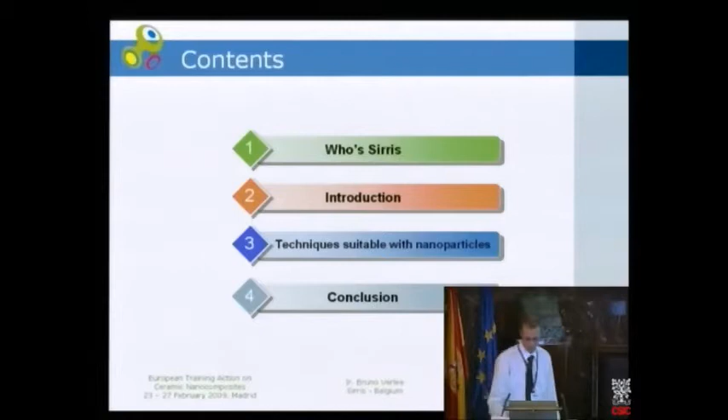I'm going to give you an overview of rapid prototyping. First, I will present my company, then give an introduction to the general principle of rapid prototyping. Then I will go into details of several rapid prototyping techniques that can work with nanoparticles, and summarize this in the conclusion.

First, who is Sirris? This is a research center with approximately 1,500 industrial members. It has 6 sites in Belgium and 140 workers, most of them engineers. There are 2 sites in Wallonia, and I work for Sirris Wallonia.

The objectives of the research center are first research, and then we also provide services for our members, and we do technology foresight. We have 4 centers of competencies in Wallonia.

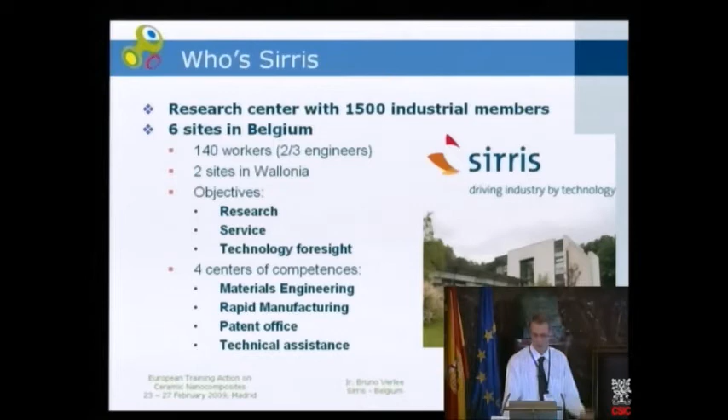The bigger one is materials engineering. We have a rapid manufacturing department, a patent office, and a small team of technical assistants to provide services to our members. With the rapid prototyping department, we make prototypes.

Prototypes can be visual prototypes, when the client only wants a real shape in his hand to check the shape, check its functionality, or check how it works in a process, just to really check the part before starting production. We can also make pre-series.

We have several machines that can use different types of materials: plastic materials, metal materials, and ceramic materials. We also have a team that develops new materials for the machines and optimizes new processes for a machine.

We also do rapid tooling. What is rapid tooling? It's rapid manufacturing of a mold with special features. We do this in collaboration with mold makers.

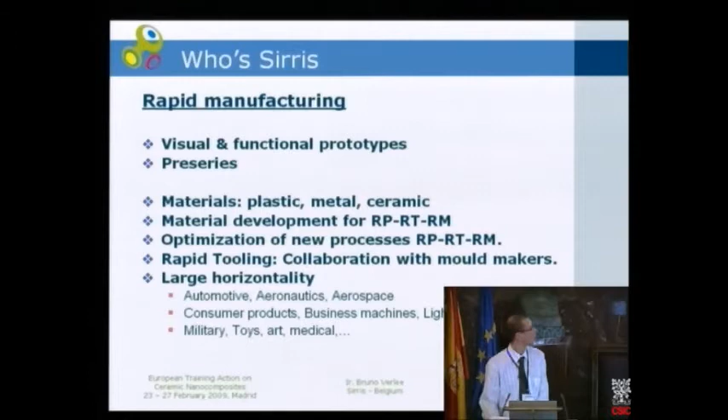We can work for a wide range of different kinds of industry: automotive, aeronautics, aerospace, military, electronics, consumer products. We can make very different kinds of parts.

Let's see now what rapid prototyping is. We have to see rapid prototyping beside another well-known technique: traditional machining. In machining, we start from a block of material and remove material with cutting tools. By milling, drilling, cutting, we shape the desired part.

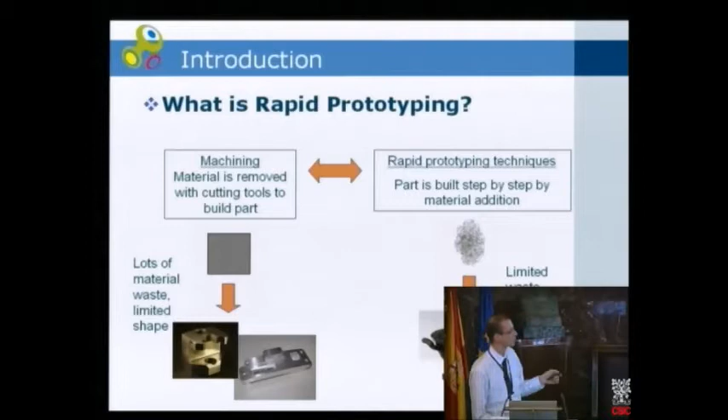Thus, in rapid prototyping, we build the part step by step by material addition. We start from a raw material—in this case, powder—and we build the final part step by step, directly, with a limited quantity of waste, and we have virtually no shape limit. Theoretically there is no limit, but there are some parameters that will limit the shapes we can do.

How does it work? We always start from 3D CAD files, and these files are sliced into 2D slices of adjustable thickness. These slices are sent to the machine, and the machine builds the 3D part by adding all these 2D slices together. We can make very complicated shapes, like this.

Here we have what we call rapid tooling: a mold with a very special feature called conformal cooling. There is a cooling channel that follows the shape of the part inside, just under the surface. We can't do this by traditional machining, but it's also possible to do it by rapid prototyping.

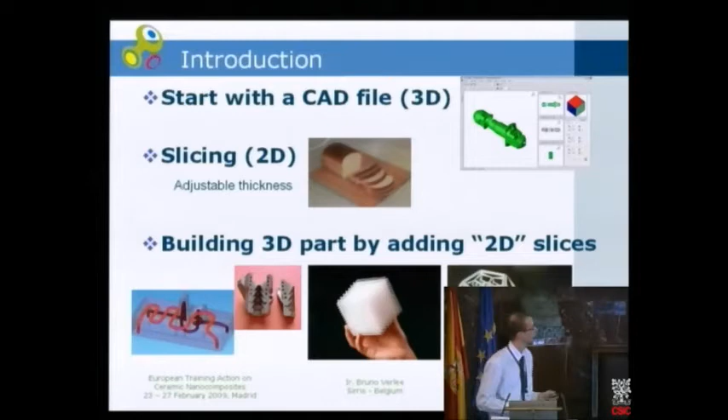We also have another example here, a metallic part with a very complex shape and a helicoidal cooling channel inside. We can make internal 3D structures like this, or simply a part with a very complicated shape using different kinds of materials.

We have different kinds of techniques that work with different kinds of materials. The building techniques build the part step by step, for example by using a UV polymerizing laser, starting with a liquid resin or a paste, which is a blend of resin and powder. This paste or resin is photo-curable, so when exposed to the laser it polymerizes, and we progressively build the part layer by layer.

Another technique is laser or electron beam melting. In this case, we start from powder—polymer powder, metal powder, or ceramic powder—and a laser locally melts the powder to build each layer of the part. The part is built layer by layer as well.

Instead of melting, you can have laser sintering or printing a binder. This binder is printed much like on a desktop printer: we print the binder onto the powder bed, stick the powder locally, and then we have to debind and sinter the part.

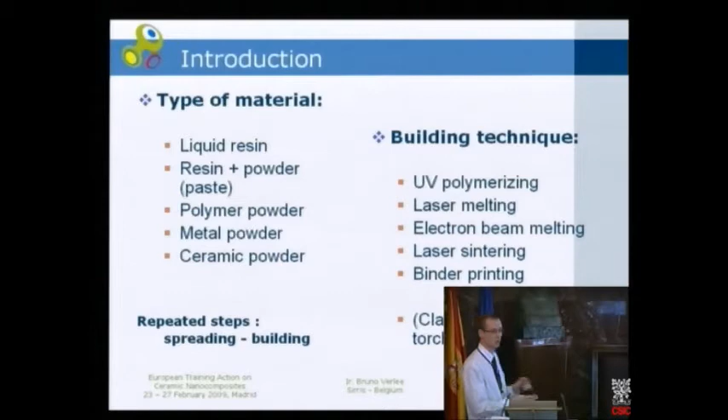There is a relatively new technology called cladding. In this technology, the two steps of the building process are done in one step. The powder is directly injected into the torch, and the part is built directly on the plate. There is no separate step of spreading and building—it's all done in one step.

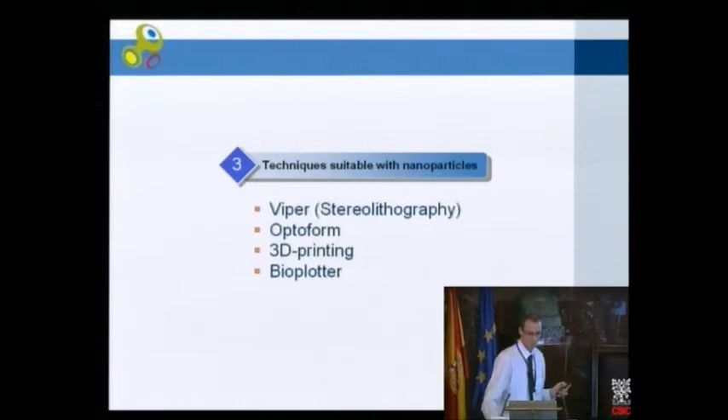Let's go now for an overview of four different technologies of rapid prototyping that can use nanoparticles. First, I will see the Viper stereolithography. Then I will see the Optoform process, then 3D printing, and finally bioplotter.

Let's go first with the SLA Viper, which is a high-resolution stereolithography. This technology is sold by a company called 3D Systems, and by using this technology, you can build a part with very small details using a UV photo-curable resin.

Here is a scheme of the machine. We have a platform on which the part is built, and this platform is immersed in a bath of liquid resin. The platform will start on the top of the liquid bath, then it will fall down by one increment, and this increment has the size of one layer.

Then a sweeper will pass above this platform and will homogenize the size of the layer, the thickness of the layer, on all the platform. After this, a laser will draw the first layer of the part on the platform, and when the resin is exposed to the UV laser, it will polymerize and progressively build the part.

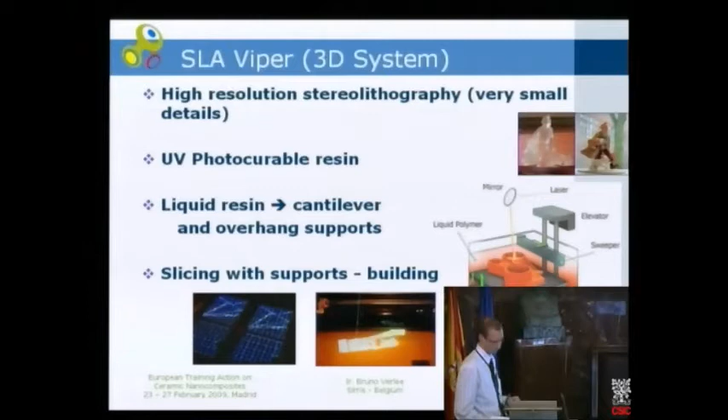Here are the features of the Viper stereolithography in high resolution mode. We have a laser beam thickness of 75 microns. The thickness of the layers is in the range of 25 to 50 microns, and these features can reach an accuracy of approximately 0.1 millimeters for small details required by some medical or electronic applications. The maximum size of the part we can build with this technology is a cube of 250 millimeters per side.

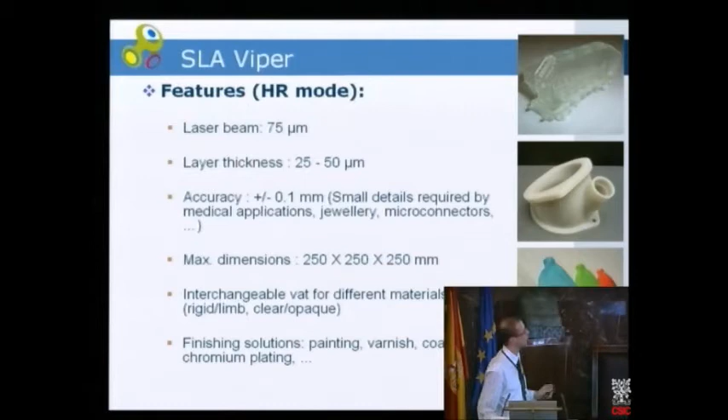One important feature of this machine is that it can use different vats containing different kinds of materials, and we can change this vat of material to build with different kinds of materials. So we can build rigid or limp materials, clear or opaque materials, and then after building we can apply different finishing treatments, painting, varnishing, coating, to really build a functional prototype in some cases, with clear or opaque resins, or with a color treatment after building.

With this technology we can also make composite parts. The interest of doing a composite is to improve the properties of the final part. The company DSM Somos produced a new resin called Nanoform. This resin is a thermosetting polymer loaded with silicon oxide nanoparticles. These nanoparticles increase the strength of the final part and the thermal resistance of the part too, and because of the small size of these particles, there is no settling inside the uncured resin, so it's a stable product.

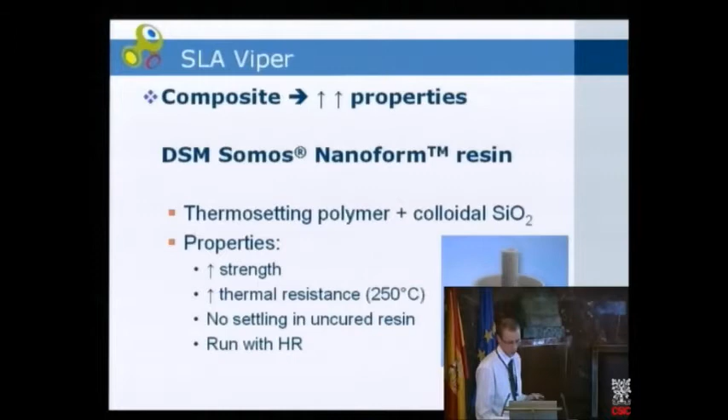And because of the very small size of the nanoparticles, it can run in a high resolution mode, so we can produce very small details in the part.

The second technology we'll see is Optoform. Optoform is a process we call direct composite manufacturing. It was developed by a small team of French researchers, and once developed, this team sold the technology and patent to 3D Systems, who now commercialize the machine. Until now it's only a research machine because there are lots of parameters needed to produce good parts. It has limited application, but we can use a large range of materials, which is its main advantage. We have about 10 machines all over the world at the moment.

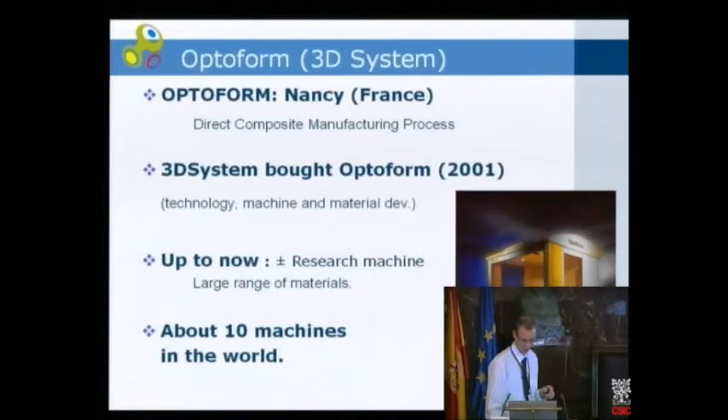How does it work? As previously, we have repeated steps of spreading and lasing, but we don't use only a resin. We use a paste, a blend of resin with a filler, about 20% to 60% in volume occupied by the filler.

The paste also contains a photoinitiator that will react with UV laser and initialize polymerization. It contains also a wetting agent because to have good final properties, we need good wetting of the filler by the resin.

And finally, we add some rheological agent that will fix the consistency of the paste. The paste must be like a toothpaste because it has to sustain itself on the building plate, but it also needs to be well spread. The viscosity has to be low when shear stress is applied during spreading. Thus, we need this thixotropic behavior for good spreading of the paste on the building platform.

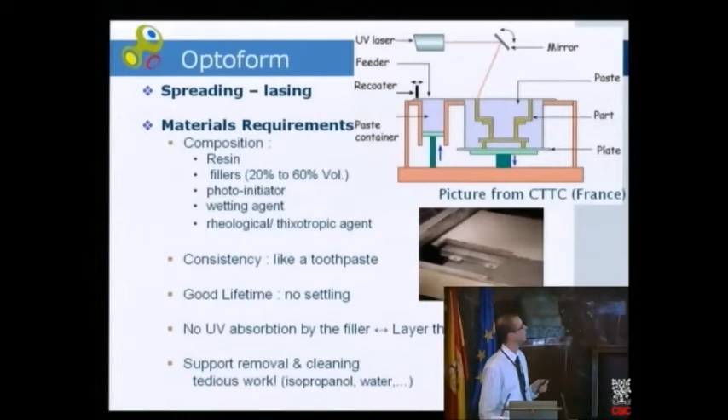So I've said we need some support to sustain the part, but after this we have to clean the part. It's very tedious work because the paste is very sticky, sticking to the part, and we have to extract it manually using solvents, sometimes organic solvents that are not very healthy, but it's the main drawback of this technology.

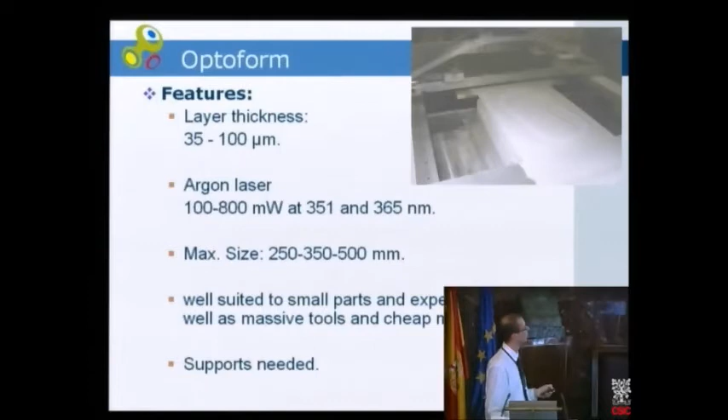Different features of this technology: a layer thickness of about 35 to 100 microns. The laser is an argon laser of 100 to 800 milliwatts. Maximum size of the part we can build is a box of 250 by 350 by 500 millimeters.

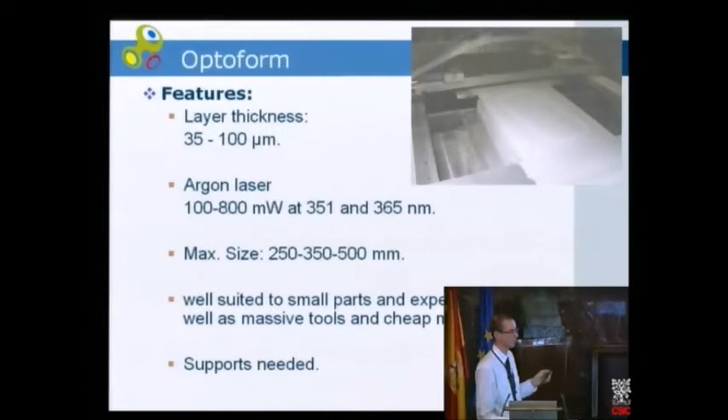This technology is very well suited to build small parts made of expensive materials, as well as massive tools made of cheap materials. Thus, we can use a very large range of different materials.

But we need some support to sustain the part inside the paste. So we can use 4 kinds of materials: plastic, rigid or soft, or we can build metallic or ceramic parts. Until now we have built stainless steel, titanium, alumina, zircon, silica, and silicon carbide parts.

But once we have built this, we have a composite, a polymer loaded with metal or ceramic particles, and we have to debind it and sinter it after shaping.

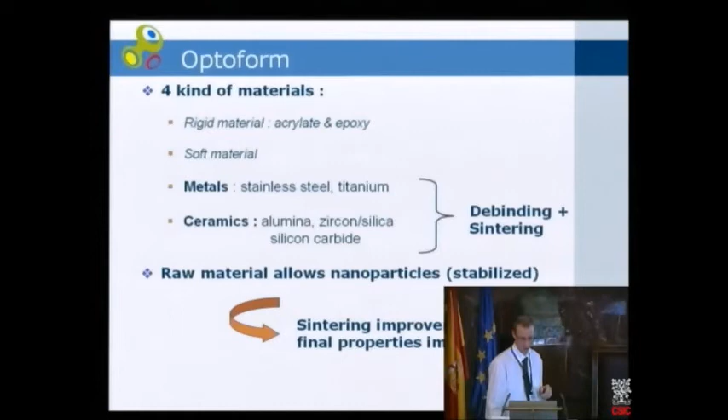The state of the raw materials allows the use of nanoparticles, because nanoparticles will be stabilized inside the paste, and these nanoparticles can be used to improve sintering or improve final properties of the part, depending on the case.

So for the Nanocare project, we developed some ceramic pastes using nanopowders: alumina paste and silicon carbide paste. We'll start with alumina paste. Two different pastes have been made.

One paste is made of submicronic alumina, and the second paste is composed of 90% submicronic alumina with an addition of 10% nanometric zircon oxide. This paste is very reactive because these two components, alumina and zircon oxide, are clear to UV, so there is absolutely no screening effect in this case.

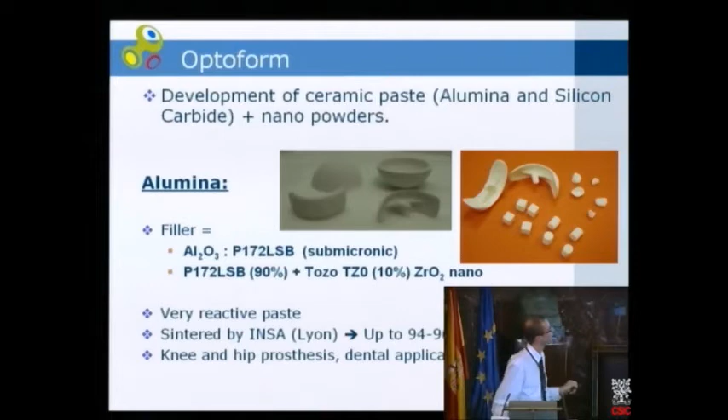And parts were sintered by INSA in Lyon, and we reached a final density of 94 to 96%. Here are some examples of the parts that have been done: knee or hip prostheses, or dental prostheses made for Nobel BioCare.

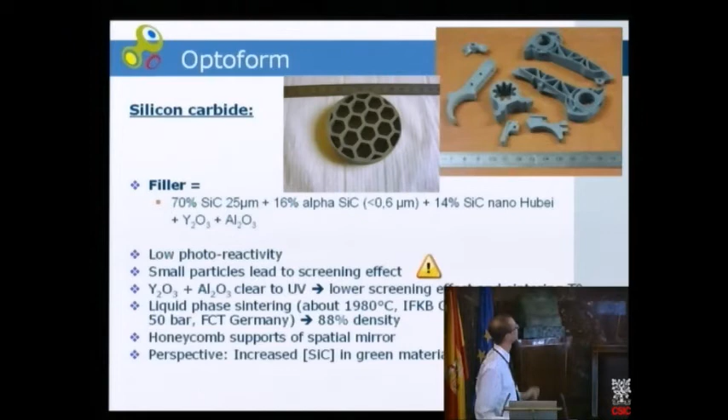Silicon carbide. We have tried to build parts using this powder composed with the paste. The filler of the paste was compound of 70% of 25 micron silicon carbide, 16% alpha silicon carbide submicronic particle, and 14% nanometric silicon carbide particle. By using directly this composition, this will lead to a very important screening effect, because the silicon carbide absorbs UV beam.

This effect is increased by the presence of very small particles. So we have to add these two components, yttrium oxide and alumina. These compounds are clear to UV and will lower this screening effect, and also lower sintering temperature, because they are melting compounds in this case. Thus, we can do liquid phase sintering with this part.

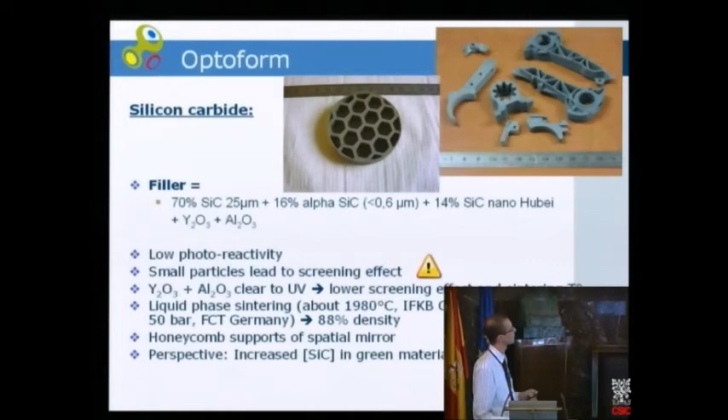They have been sintered at about 2000 degrees at IFKB or FCT in Germany. Examples of parts we made are shown here. We have several technical parts, and this part was made for the NanoCare project. It was a honeycomb support for a spatial mirror, and we reached a final density of 88%. This was not very bad, but not very good either, because we can increase this final density by increasing the concentration of filler inside the paste. So it will perhaps increase the final density this way.

Another technology is 3D printing. In 3D printing, we are going to build the part layer by layer as previously, but this time by printing a binder or special agent. When we print a binder, we can produce a part - this is what we call rapid manufacturing or 3D printing. Or we can start with an electronic card on which we are going to print some special agent or special materials, only one layer of these materials. That's why we call this application 2.5D printing.

Why is it called 3D printing? Because it uses exactly the same technology as an inkjet printer, so it has lots of common parts with this technology. This 3D printing was developed by MIT in the United States. They split the patents into different kinds of materials.

They sold patents using gypsum powder to Z-Corp Corporation. Z-Corp uses 3D printing of gypsum powder to create visual prototypes or to make casting molds. Just by using gypsum, it will print with a white binder to have this kind of part, only a visual part. It can print a clear binder with color inked with the binder to provide a colored part that can be used as a visual prototype to really show the inside of a part for exhibition, or simply the guest can have the part in his hand to check its functionality.

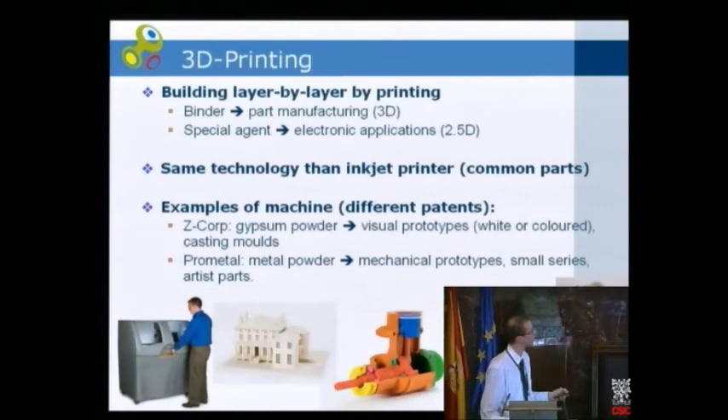The other patent concerns metal powder. It was sold to ProMetal, the ExOne company, and ProMetal used 3D printing to build real mechanical prototypes that can really be used in specific applications, or to build small series of very special parts, or simply artist parts like this - parts you can't produce another way. You can't produce this by traditional machining.

How does it work? As previously, we start from CAD files, and in the machine we have a building plate and a feed box. First, the building plate will go down by one increment. This increment has the size of one layer, and a spreader will spread a layer of powder on the plate. Then the printhead will print the picture, the first layer of the part.

Then we have the drying step. This happens because the binder is a solution, a binder with water. This drying will evaporate the water, and only the binder will stay, which sticks all the particles together to shape the final part. Step by step, the part will be built just by repeating: spreading, printing, drying, spreading, printing, drying. This way we can build very complicated shapes.

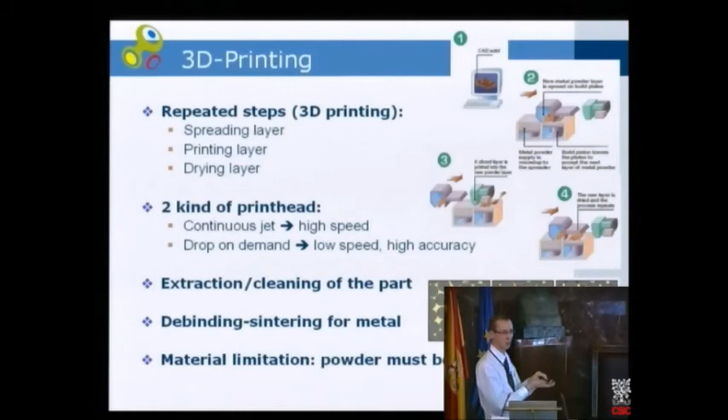So there is only one limitation, one requirement for this technology: the powder must be well wetted by the binder. Because if not, when you print the binder, it will stay as binder droplets on the powder bed. The binder won't percolate inside the bed, and you won't have good sticking of the particles or good sticking of the layers between them.

This technology can also be used with nanoparticles to improve sintering or specific properties of the final part. We can add nanoparticles in the powder bed, but with the volatility of this powder and the fact that the worker is always in contact with unprinted powder, it's too dangerous, too hazardous to use nanoparticles in powder bed.

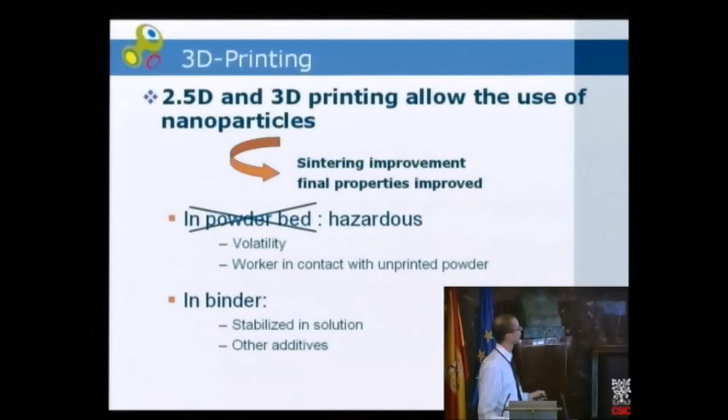We forget it. But we can add nanoparticles inside the binder because of the very small size of the particles, it can be passed through the printhead. Inside the binder, nanoparticles will be stabilized, and we have to check if there is no settling inside the solution. We can also add other things at the same time in the binder.

The last technique is what we call bioplotter. It's a technology sold by EnvisionTEC. But first, it was initially developed to build new organs, working by local injection of a cell culture in a nutrient gel.

Just by using needles, there will be injection of cell culture with nutrient gel. By using different kinds of cells and different kinds of nutrient gel, this will lead progressively to cell differentiation, and finally we can create new organs with very specific functions. By using this technology, human skin has already been built, and several tests are currently being done to make other organs, like liver for example.

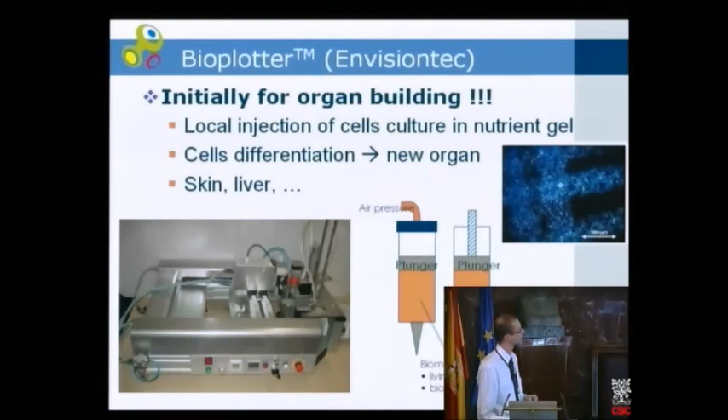This technology can be extended to high viscosity materials. We can replace the needles by an extrusion screw. We can have a local extrusion of a cylinder, and this cylinder will be used to build the final parts as previous, layer by layer, and here line by line.

We can dispose different cylinders side by side to have a full dense part, or we can let a specific void between them to make a porous structure.

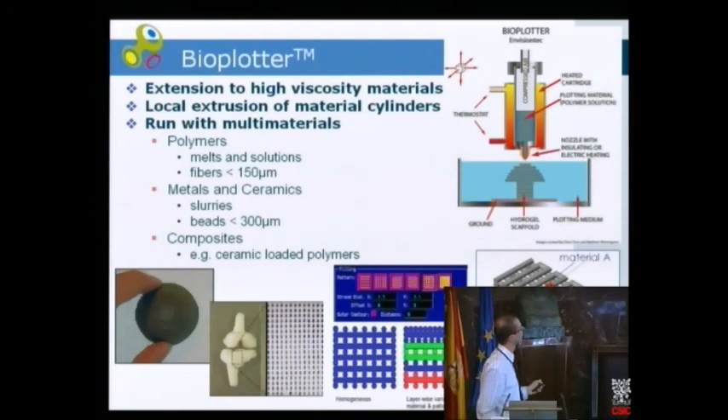We can also use different kinds of materials by using different heads. We will spread first materials, then we can change the head, spread another material, and apply different texture to the part. What is important here is that we can use different kinds of materials too: melt polymers, slurry of metal or ceramics, or composites made of metal or ceramic particles loaded inside the polymer.

So in this case of composite, we can do ceramic injection molding. We could have a local extrusion of a cylinder made of this composition, a blend of thermoplastics loaded with micro or nanoparticles. These nanoparticles can improve sintering and properties as previous.

We will do local extrusion of a thin line, and by repeated steps of lining, of extruding this line, we can build one layer of the part, and by repeating these steps, we can build progressively layer by layer the final parts. But this part is also a composite part, thus we have to debind it and sinter it after.

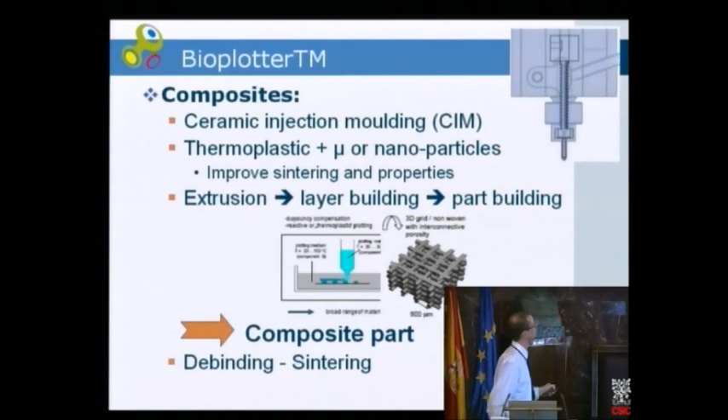So, to summarize: we have seen that rapid prototyping technologies are very suitable to build prototypes and very small series of parts. These parts can have a very complicated shape, it's not a problem. Theoretically, we can do every shape we want, but there is some limitation due to some of the techniques we use.

The parts are made layer by layer by material addition, in opposition to traditional machining, in which the parts are made by material removal. We have seen that some techniques can use nanoparticles to improve some properties of the final part, or simply to improve the sintering steps needed with some techniques.

With the Viper stereolithography technique, we have Nanoform resin, which is a blend of thermosetting polymers with nanoparticles of silicon oxide. We can keep the high resolution mode of the stereolithography. We can build very detailed parts with improved strength and thermal properties higher than current resins.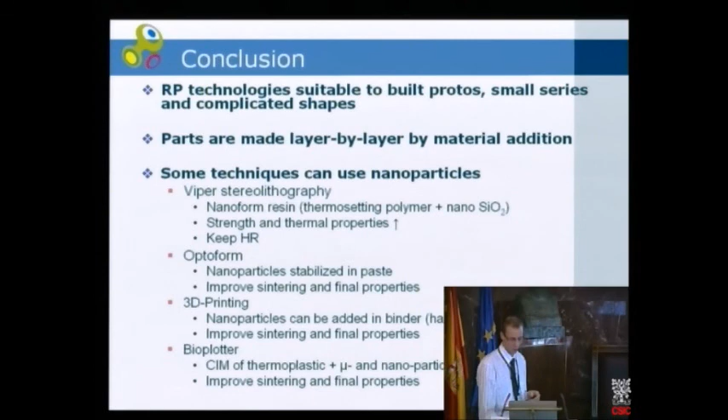And finally, by using bioplotter, we can do ceramic injection molding of thermoplastics loaded with nanoparticles and microparticles, and this will lead to improving sintering and final properties too.